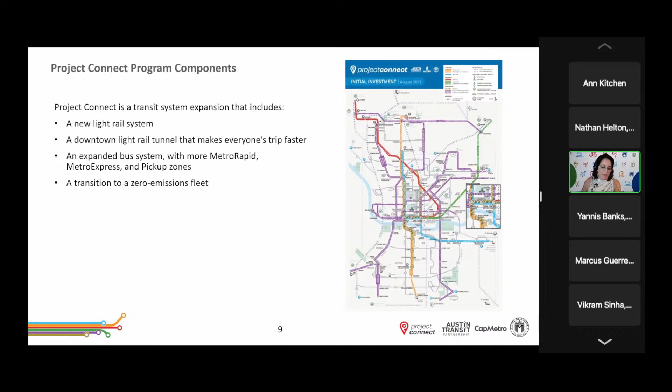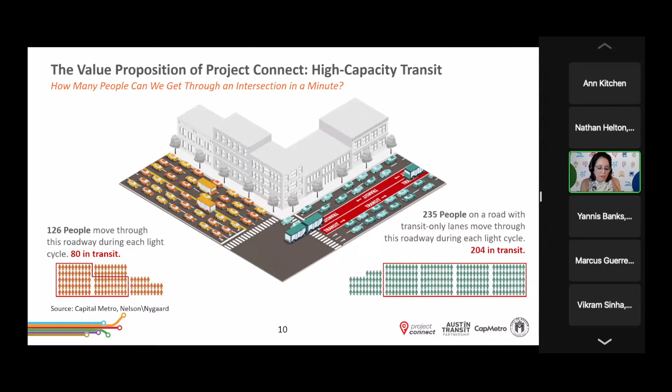Project Connect reflects the community's values. The first being opportunity and equity. Project Connect will create thousands of good local jobs and provide more access to healthcare, education, employment, essential services, entertainment, and will also create and maintain more affordable places to live.

Environment and sustainability is a second value, and there is a shared passion in our community for the environment. That's why our commitment to environment and sustainable practices are core to Project Connect. We are already working towards our zero emission fleet and will continue to lean into the challenge to conserve and protect natural resources in the decisions that we make.

And finally, our third community value comes to be innovation and technology. Technology and innovation inspire much of who we are as a region, and Project Connect will embrace that spirit, making transportation smarter, more efficient, more enjoyable, and easier to use.

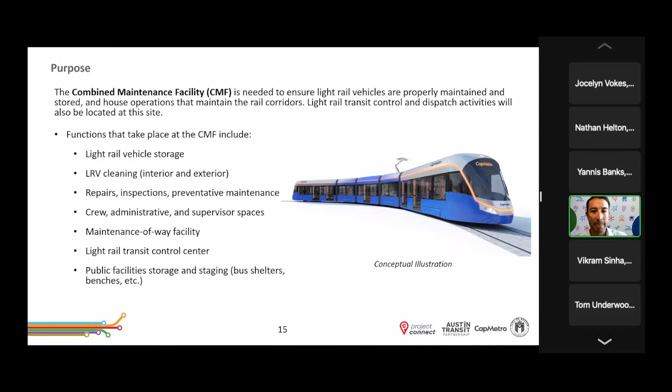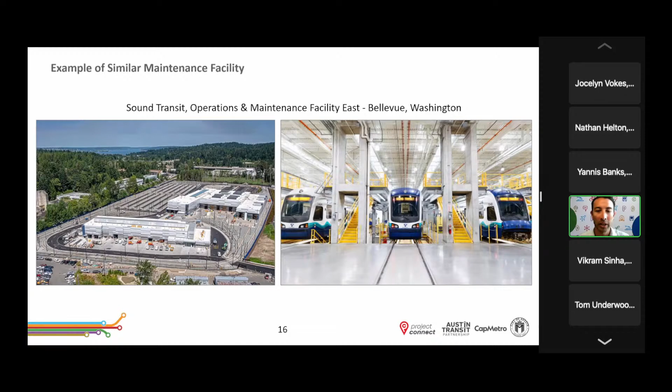Different types of repairs on the vehicle could take place by different mechanics. With that paint booth, is that something that's done now at Cap Metro, when it comes to buses and trains? Yes, on our bus side, we do have a paint booth associated with one of our bus depots. On the train side, I believe we actually ship that off site currently. But painting the vehicles is kind of a normal thing the bus companies are doing. That is correct.

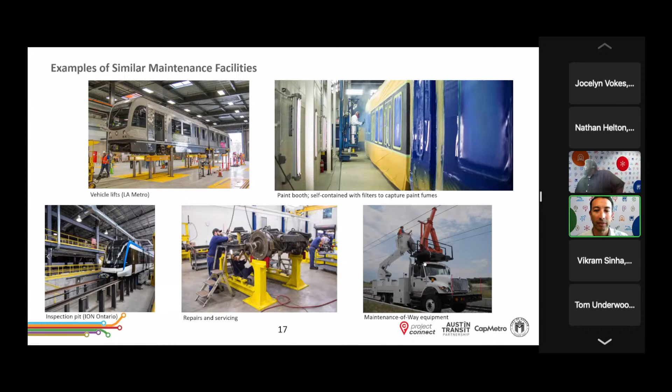The maintenance-of-way equipment on the bottom right-hand corner is an example of the maintenance-of-way crews actually out there on the corridor taking care of overhead catenary wires or the track work.

Other functions that would occur on the site include cleaning the interior and exterior of the train. We envision an automated train washer, which is pretty typical for these types of facilities, with scrubbers and jets to wash down the outside of the vehicle, and then staff and crews to help take care of the interior cleaning on a daily basis as well.

Let's go back to the train washer. I know for the bus wash, it's always something people want to tour or ride in. I don't know why, but the bus wash seems very exciting for the community. Would that be something similar people could do here, get a tour of the train washing area? Yeah, I'm sure that's something we can work out with the community or tour groups.

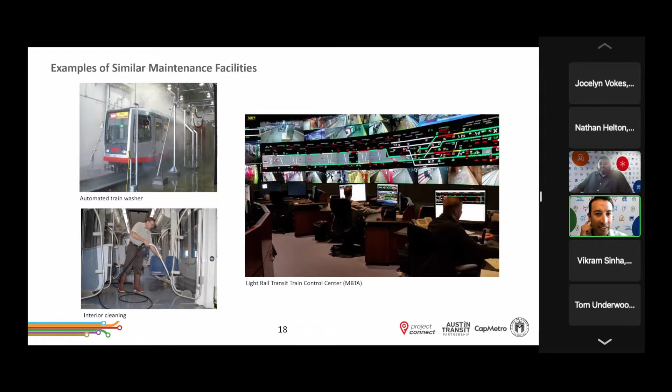And that's similar to the center we have now over at North Ops, correct? It's a larger version of that. This Boston example is a little bit larger than what we currently have, so we'd be doing something similar for our new light rail system on this site. That's exciting, I can't wait to see something like that, because it looks like you're on the deck of a ship or something. You can control so many different things. Yeah, mission control, that's a good way to put it.

At the core of Project Connect is also sustainability values and principles. When we design and plan this facility, we'll evaluate different sustainability features and how we could incorporate them and their benefits. We're looking at canopies with potential solar panels, which could generate on-site power or feed back into the grid. We'll also look at landscaping with native, drought-resistant plants to reduce water consumption, and how we could capture and reuse rainwater on site for landscaping areas.

So what would a green roof do? What would be the purpose of having that? A green roof does a couple of different things. It reduces heat gain on the building, because instead of a metal roof baking in the sun and heating up the building, the green roof helps absorb some of that heat and keeps it from getting inside. This lowers internal energy costs, with less air conditioning costs throughout the year. There are some benefits and trade-offs though—the steel structure has to be heavier to accommodate the heavier load on top of the roof, so there are trade-offs we'll evaluate.

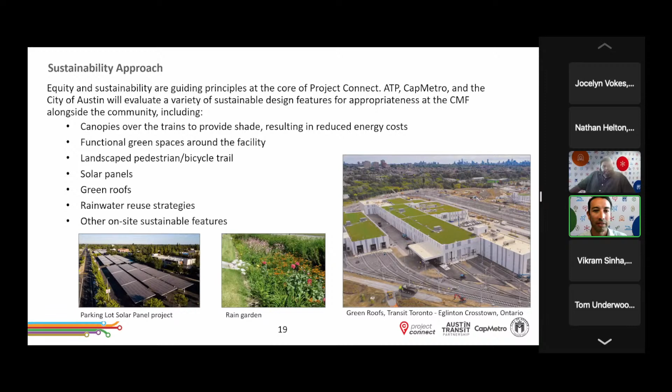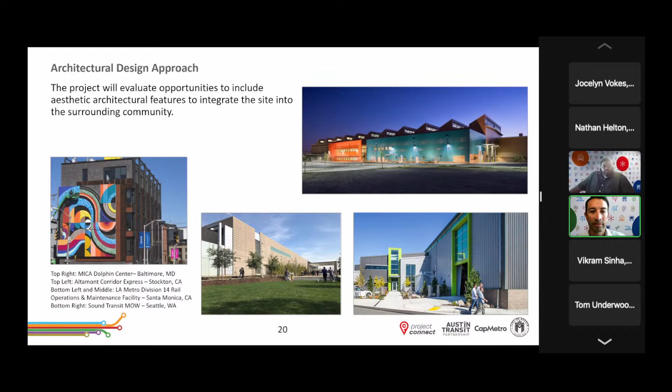And then I'm going to hand this slide back over to Jocelyn, and she can explain some of the community opportunities with the project.

Yeah, so here, this is where we want to talk about, not only are we excited about the possibility of public art opportunities that we can incorporate, but we're also excited about what this means for our community. So a few weeks ago, CapMetro unveiled the Art on the Bus, completed by elementary school students in Austin and in the surrounding districts. It was an exciting moment to see elementary age school children excited about their art being featured on our electric buses. And then they became, as a result, because they were involved, excited about transit.

And so as we're rolling out this project internally, we're consistently asking ourselves, how do we keep the excitement and this momentum going? Are there possibilities for us to mentor middle school students starting now? Can we create new lines of study in our career and technical education programs? Can we develop new fields in workforce development by partnering with school districts, community colleges, and trade schools? We hope so, and we hope that you can help us think of those future partnerships.

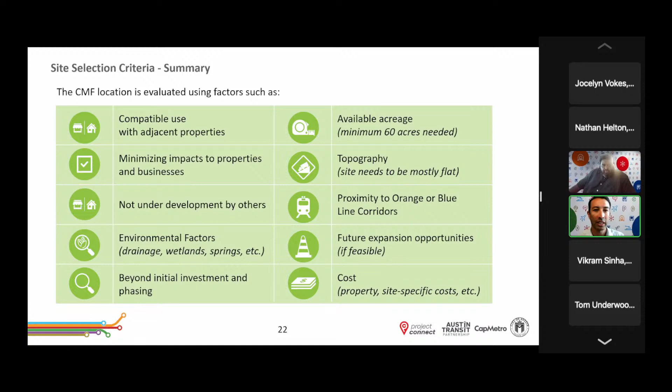So when we took that criteria from the previous slide and looked at different properties around Austin that fit that criteria along the Orange Line and Blue Line, Austin Transit Partnership and CapMetro did a couple of studies, starting back in 2019, more in 2020, and even up into 2021, to see where suitable parcels and properties would fit all the items needed for this project.

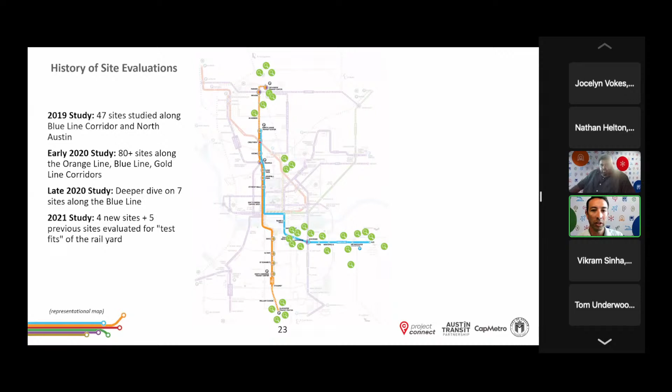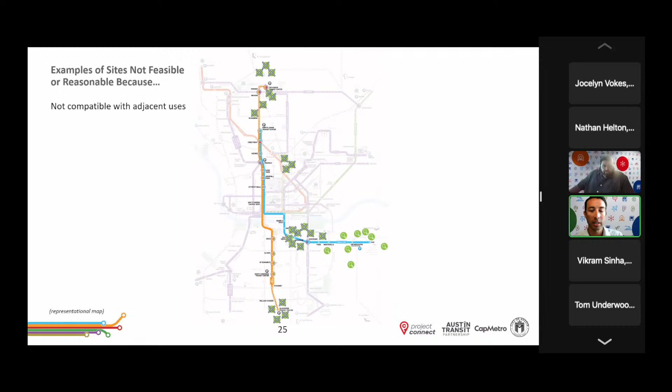This next site is an example of sites that are not compatible with adjacent uses. We want to make sure this fits well within the neighborhood context, and isn't highly urbanized or already built up by existing properties. So undeveloped sites are preferred. Again, this is a representational map showing generally the sites that were looked at. For this slide, it looks like along Riverside and Pleasant Valley is where we were looking, but it's not going to work.

Right, so the starting point is to find a site along one of the corridors—what's along Riverside is the starting point. But when you actually evaluate those sites, there aren't many that are 60 to 70 acres without impact on businesses and residential areas in that zone, so they fall off the list. That's important because we want to displace as few people as possible—that's the goal.

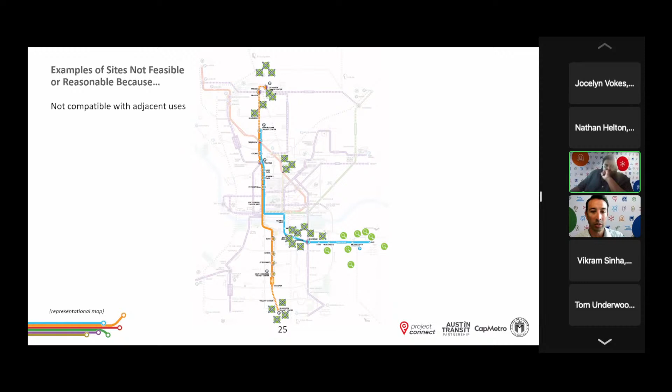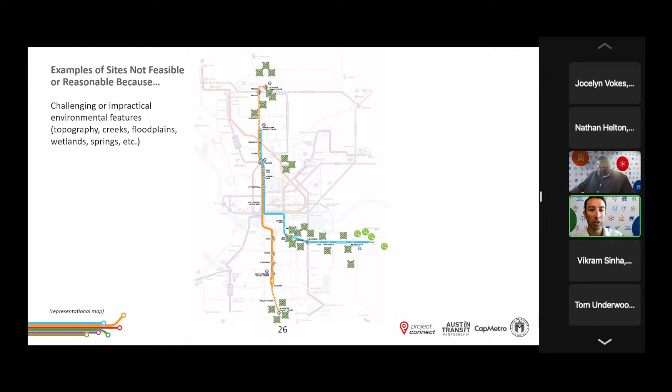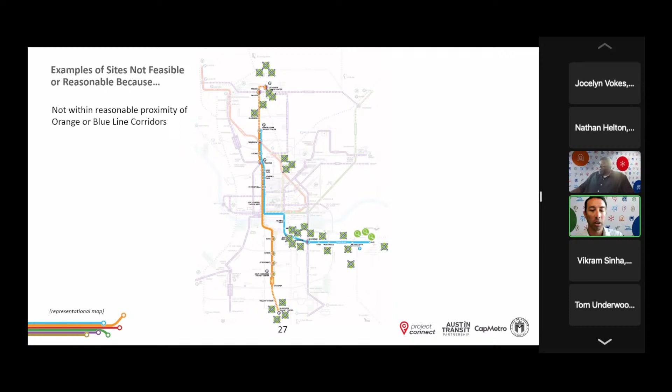Here's an example of other sites falling off because they're too far outside of the Orange Line or Blue Line corridor—sites even east of the airport by a couple of miles are not feasible or reasonable at this time. This leaves parcels near the end of the Blue Line, in the airport proximity, north of Highway 71, as the parcels currently being evaluated.

This has a different timeline than the orange line and blue line, because this is one of the first components of the program that has to be built first. So the combined maintenance facility has to be built and ready in order to receive the first trains, test them, and test the track work, get the trains ready before a customer can even get on the system. That's why I wanted to mention the combined maintenance facility is a key component of the entire program. Without the facility being built or ready, we are not able to receive trains, get trains ready, and therefore we can't have anyone actually ride the system until the facility is built like that. So it's kind of a domino effect.